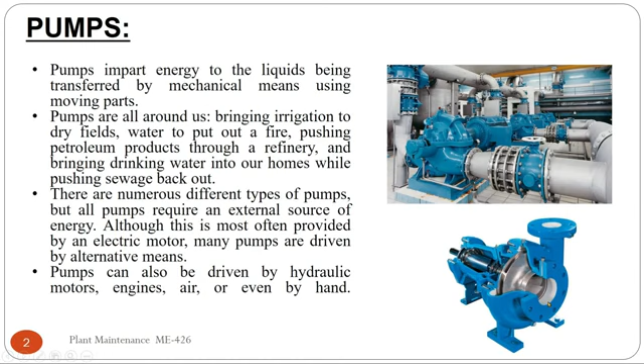Now, pump classes. There are a variety of ways in which pumps can be classified, as per direction: horizontal or vertical. There is also vertical pump, as you have seen in power plant engineering, for example in boiler feed pumps. Or the most common division of pump is, on one hand we have dynamic pump, and on the other hand we have positive displacement pump.

Dynamic pump, the most common is centrifugal pump. On the display we have reciprocating pump, rotary pump, piston pump, diaphragm pump, gear pump, lobe pump, screw pump. There are different types, and we also have multi-stage pumps depending on the pressure required.

Each pump has its own characteristics. We are not going into detail of the classification of pumps, as you have already studied in the fluid mechanics course. We will only go through the basic operation of positive displacement pump, then centrifugal pump, then look into the installation of pumps, maintenance aspects, and inspection of the pump.

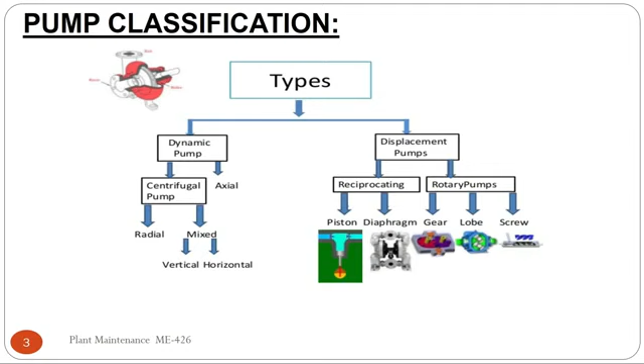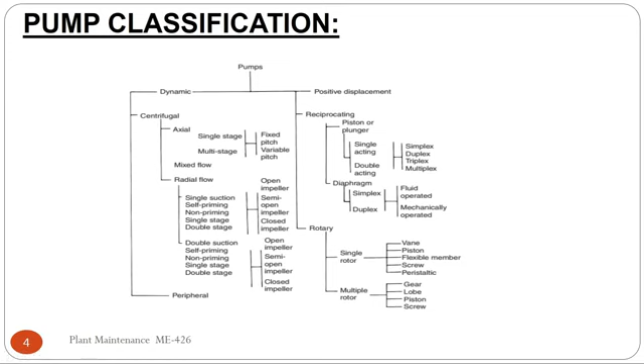This is a broad classification of pumps: dynamic, positive displacement, centrifugal, axial, radial, open impeller, semi-open, reciprocating, piston, plunger, diaphragm, rotary, vane, screw. Mostly reciprocating or positive displacement pumps are used for viscous products. You must already know the basic difference between dynamic and positive displacement pumps from the fluid mechanics course.

In any industry, pumps play a vital role. For example, take any petroleum industry like PSO, Shell, or Chevron. The pump is used to take suction of the products coming through the oil tankers, pumping it to the tank, and then taking suction from the storage tanks back to the tanker so that it can move all over across Pakistan.

For example, if we have a firefighting pump, and all of a sudden fire erupts, because fire does not call you and say I am coming. If the firefighting pump does not operate at that moment, then what will happen? This is a major thing that maintenance personnel have to keep in mind, that pumps should be running all the time.

That's why we have a standby pump. So first of all, positive displacement pump. Positive displacement pumps, as you have learned, are named after the fact that they displace nearly the same amount of liquid per cycle regardless of system pressure. They take liquid and pump it on the other end regardless of the system pressure. These are the piston, this is the inflow, this is the outflow. It traps a fixed amount of liquid.

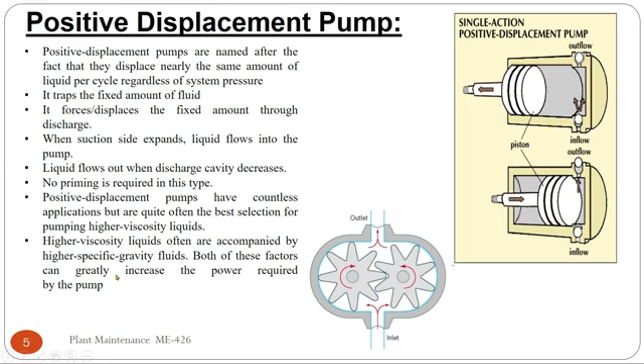This is the view of the gear pump, a positive displacement pump. As we have already told you, positive displacement pumps will produce the same flow at a given RPM no matter what the discharge pressure is.

They take a specified amount of liquid and pump it regardless of the discharge pressure. A positive displacement pump cannot be operated against a closed valve on the discharge side. In a centrifugal pump, if the discharge valve is closed, the pump will work for a short period of time. But in case of a positive displacement pump, if the discharge line is closed, after some time it may cause damage.

If a positive displacement pump is allowed to operate against a closed discharge valve, it will continue to produce flow which will increase the pressure in the discharge line until either the line bursts or the pump is severely damaged, or both. This is the view.

Supply tank from which product is coming, and the positive displacement pump is pumping it to the discharge tank. This is the supply tank, this is the positive displacement pump taking suction, and if the discharge valve on the pump side is closed, or the inlet valve of the discharge tank is closed, then the line will burst out after a certain time.

So we must have a return valve or bypass valve. The bypass valve will bypass the product back to the supply tank. It is a common practice in industry to install a bypass valve on the discharge line.

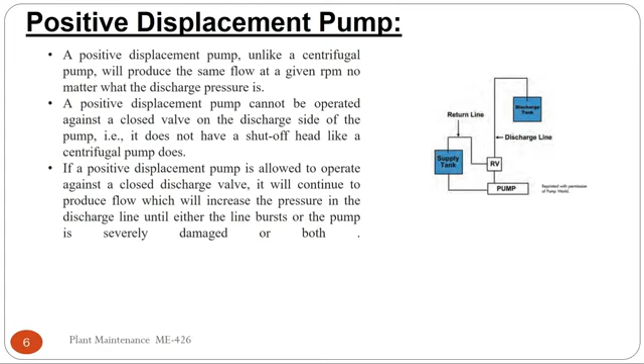The purpose of a centrifugal pump is to convert energy from a prime mover, maybe an electrical motor or turbine or diesel engine, first into kinetic energy, then into pressure energy of the fluid being pumped. These energy changes occur by virtue of two main parts: the impeller and the volute or diffuser. The impeller is the rotating part that converts driver energy into kinetic energy. The diffuser is the stationary part that converts kinetic energy into pressure energy.

This is a view of the pump. This is the impeller. This is the casing, volute shaped, or diffuser. This is the eye of the impeller. This is the inflow side. This is the hub plate on which the impeller is mounted. This is the casing. These are the blades.

Now, first of all, let's see a video of the basics.

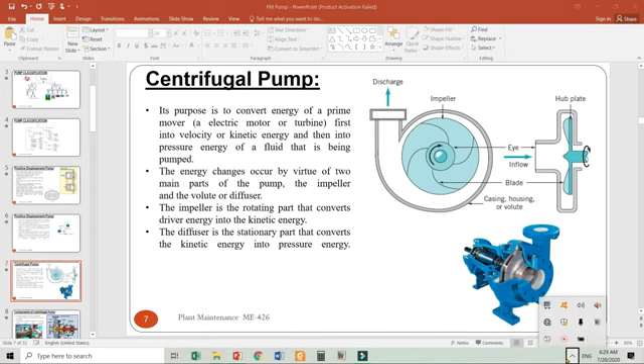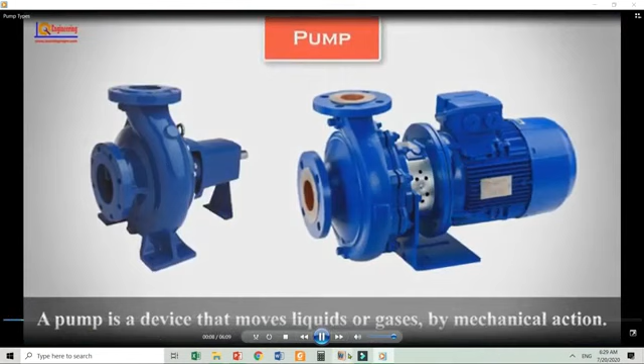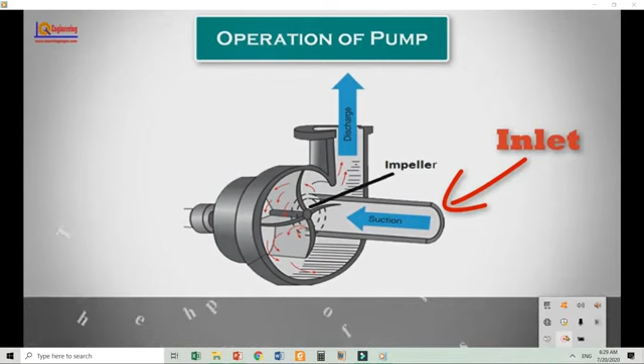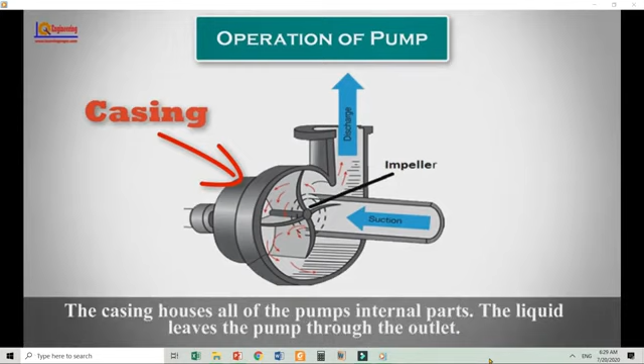A pump is a device that moves liquids or gases by mechanical action. All pumps have an inlet, a casing, and an outlet. During operation, liquid enters the pump through the inlet located here. This side is also called the suction side, where the pressure of the liquid is lowest. The purpose of the pump's casing is to contain the liquid during operation, and it houses all of the pump's internal parts. The liquid leaves the pump through the outlet, also called the discharge side, where the pressure of the liquid is highest.

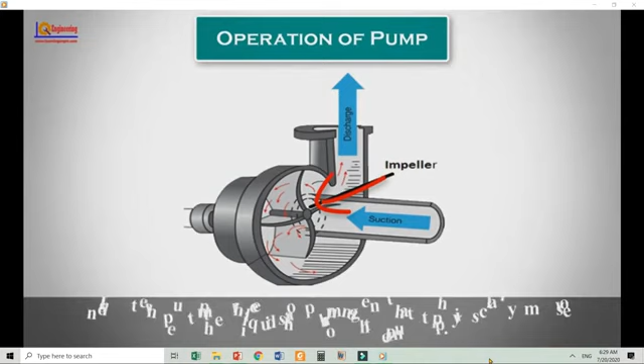Inside the pump there is a component that physically moves the liquid through it. The type of component used determines the type of pump. Basically, pumps can be grouped into two general categories: positive displacement pumps and dynamic pumps. A positive displacement pump makes fluid move by trapping a fixed amount of it and forcing or displacing that trapped volume into a discharge pipe or discharge system. Some positive displacement pumps use an expanding cavity on the suction side and a decreasing cavity on the discharge side.

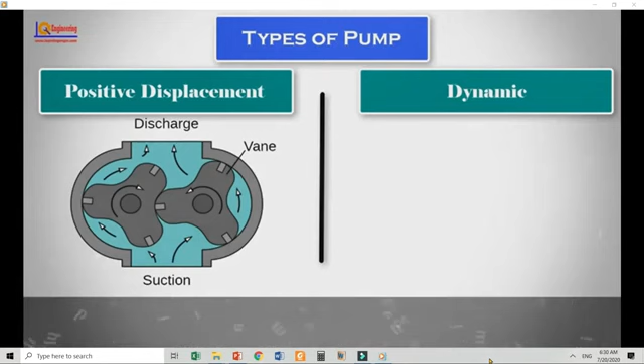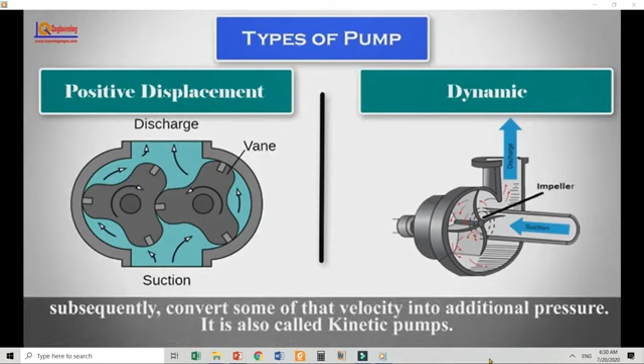Dynamic pumps impart velocity and pressure to the fluid as it moves past or through the pump impeller, and subsequently convert some of that velocity into additional pressure. They are also called kinetic pumps, using a liquid velocity passage. Now, types of positive displacement pumps.

Examples of positive displacement rotary types are lobe pumps and gear pumps. They are commonly used in industry to pump furnace oil, as in PSO. The gear pumps or rotary lobe pumps are used for pumping the furnace oil.

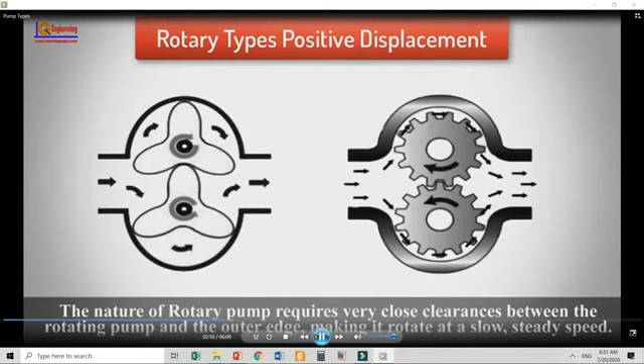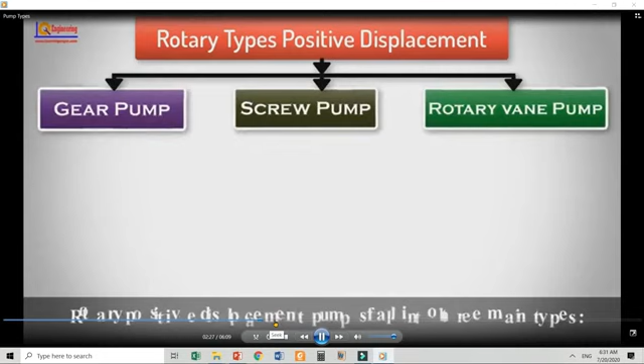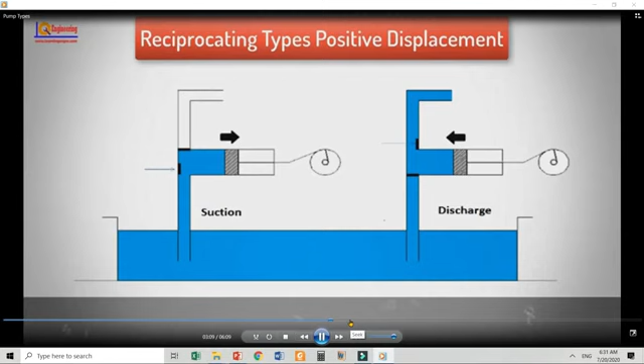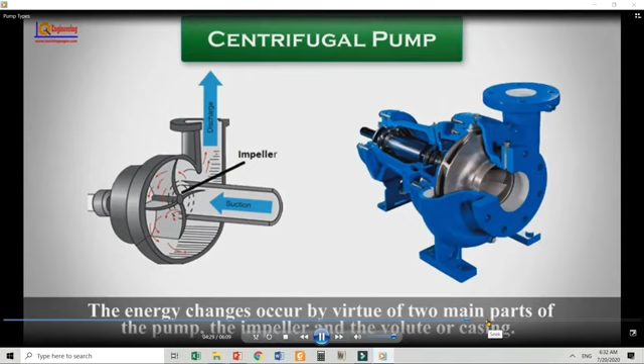Parts of the pump include the impeller and the volute or casing. The function of pumps is subdivided into several categories. Centrifugal pumps can also be classified into axial flow or mixed flow, depending on the application required.

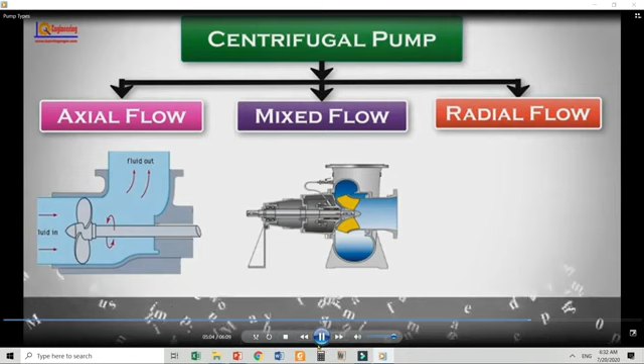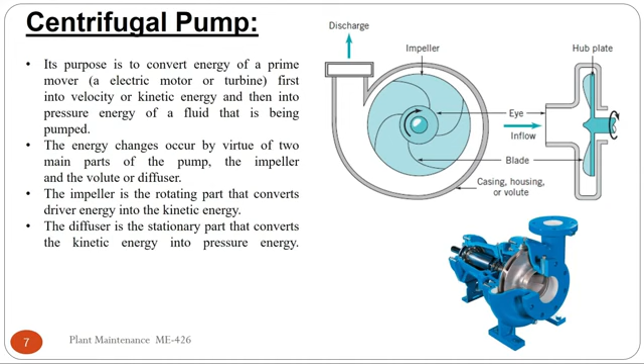Now we start our main discussion: components of the centrifugal pump. A centrifugal pump, in short, has two main components: a rotating component comprised of the impeller and a shaft, and a stationary component comprised of the casing, cover, and bearings.

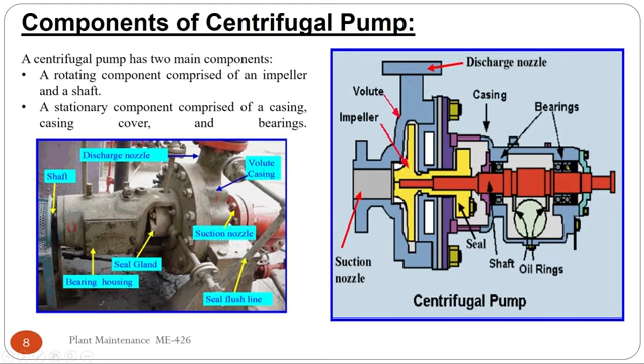Now, casings are generally of two types, volute and circular. The impellers fit inside the casing. This is the shaft, these are the bearings.

I have seen in my life in PSO the shaft breaks into two pieces. The shaft diameter was 25 mm, meaning 1 inch, and made of SS. This was mainly due to the bypass valve

Of the pump being pinched or closed, because operational personnel, there is always a fight between operation and maintenance. Maintenance says operation doesn't do proper work, operation says maintenance is always sleeping on time. This is a common thing.

I have worked around 6.6 years, and around 2 or 3 months in PSO in the maintenance department, and the maintenance department has no backup. We are 2 mechanical engineers, 1 diploma holder, and the fitters and electricians under our team are non-diploma holders. Sometimes we don't have any fitter or electrician in the shift, and we are not running a single plant of 83 acres.

We are running 3 plants, one of 83 acres, one of 100 acres, and another of around 20-25 acres, in a vicinity of 14 or 15 kilometers. The 3 plants are interconnected by pipeline which goes through the roads. So

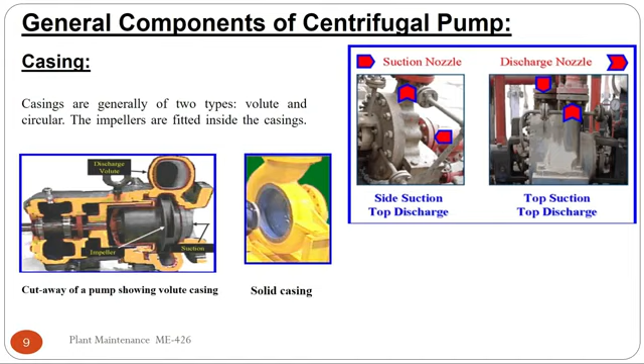Now another topic comes, seal chamber and stuffing box. Seal chamber and stuffing boxes are the main components of the pump. It refers to a chamber, either integral with or separate from the pump casing, that forms the region between the shaft and the casing where sealing media is stored.

As we know, on the casing we have the impeller. The shaft is connected to the impeller and goes toward the coupling side, and on the other side of the coupling there is the motor side coupling. Now, where the shaft leaves the casing, there is a gap between the casing and the shaft, so air or any other thing might enter due to this clearance. So we must close the clearance between the shaft and the casing.

There are different types of methods to seal that clearance. When the sealing is achieved by means of a mechanical seal, the chamber is commonly referred to as the seal chamber. As highlighted here, this is the mechanical seal, this is the shaft, this is a rotating shaft.

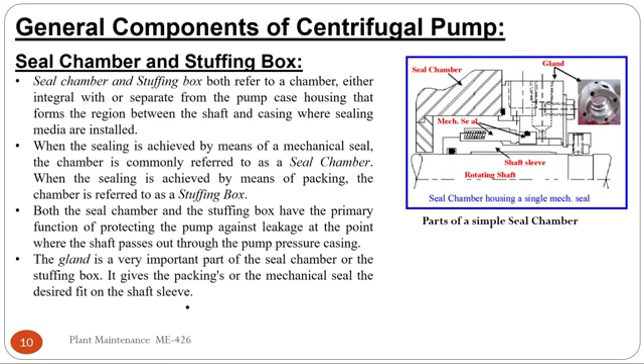This is the gland, which holds the seal. The gland, when part of the seal chamber or stuffing box, gives the packing or mechanical seal the desired fit on the shaft sleeve. Desired fit means it holds the shaft, it holds the packing on the shaft.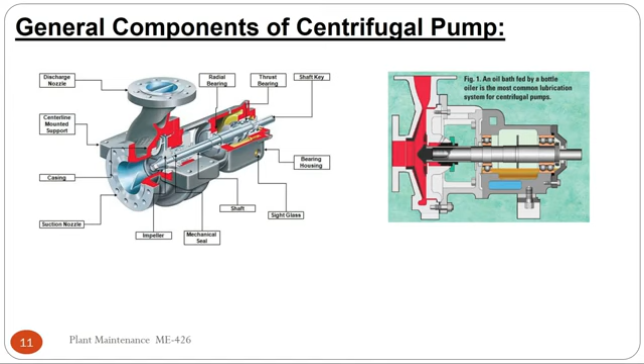This is another general component of a centrifugal pump: the impeller. The impeller is the main rotating part that provides centrifugal acceleration to the fluid. There's closed impeller, semi-open impeller, and open impeller. You must have basic knowledge of where open impeller is used and where closed impeller is used. For clean liquid, what impeller is used? For dirty liquid, what type of impeller is used? Sometimes the impeller gets clogged, so you must keep this in mind.

What are the major things we keep in mind while selecting a pump? First, the fluid, whether it is viscous or non-viscous, whether high head or high flow rate is required, and what pressure is required. Then we select whether we require a centrifugal pump or a positive displacement pump. Then we calculate the piping and the pressure drop. Then we select the suitable pump based on what GPM is required and what head is required. Similar to air conditioning systems, we must keep a safety factor in mind while selecting a pump, and we must have a standby pump on the other side.

Now let us see another one.

This is all for today's lecture. Inshallah, we will start week 2's second lecture, where we will go through the installation of the pump, the maintenance of the pump, and the inspection of centrifugal pumps. Today we learned the basics: why the pump is the backbone, what are the basic types of pumps, and the general components of a centrifugal pump.